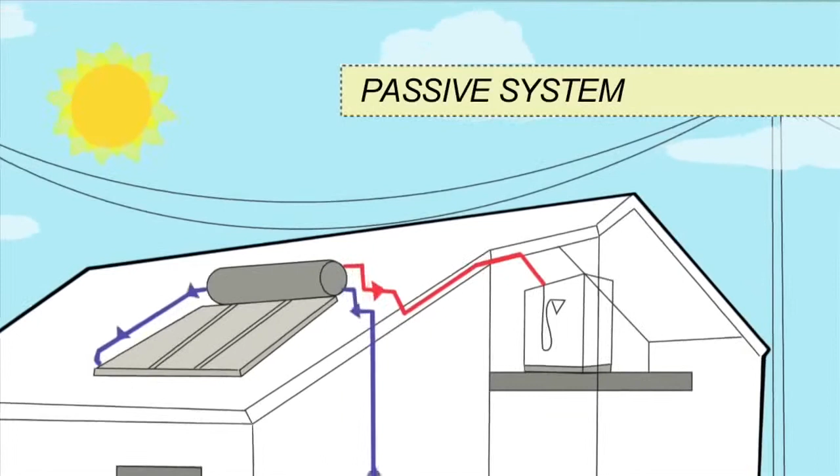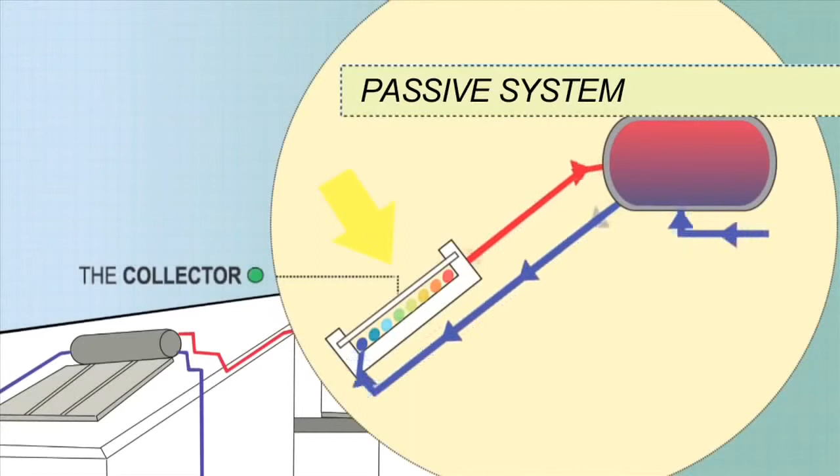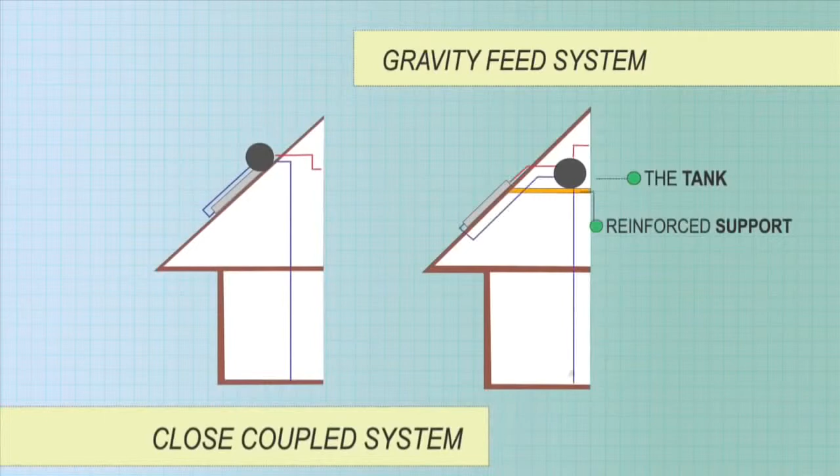In passive systems, also known as thermosiphon systems, the tank sits above the collectors. Colder water sinks into the collectors, whilst warmer water rises unassisted from the collectors into the tank. The tank may sit on the roof with the collector, a close-coupled system, or within the roof cavity above the collector, a gravity feed system. With these systems, the roof support structures must be strong enough to handle weights of up to 800 kilograms.

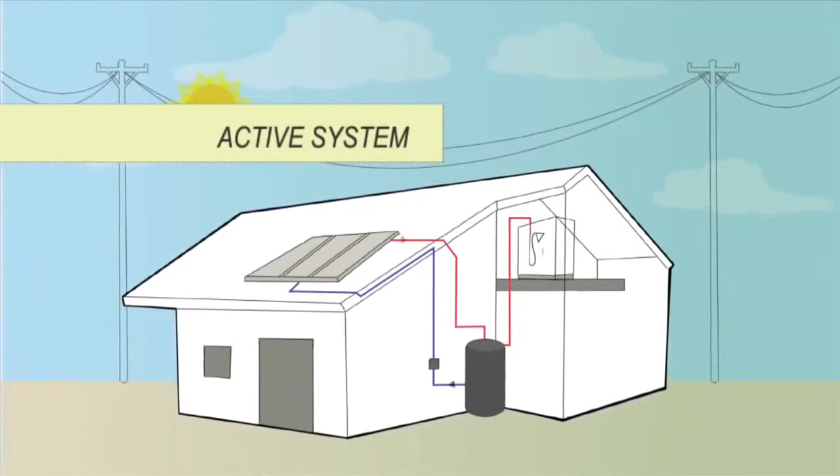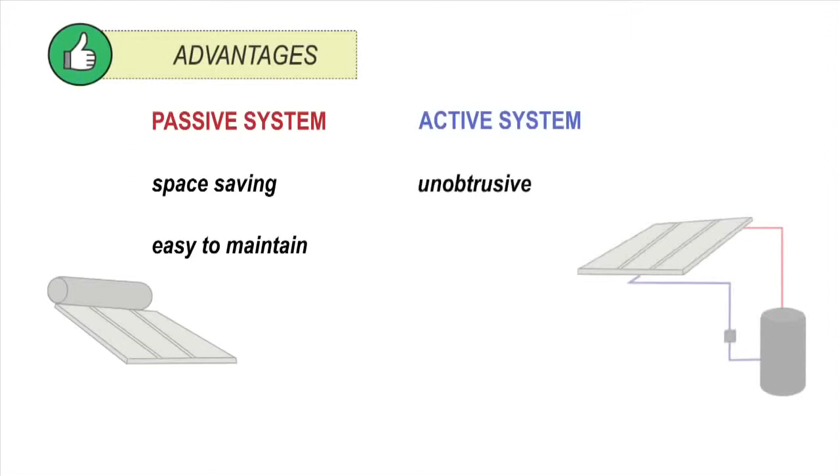Active systems use a small pump to move water between the collectors and the tank. The location of the tank can be within the roof or on the ground. Each type of system has advantages. A passive system is space-saving and is easy to maintain with no moving parts. An active system is unobtrusive, lightweight, can use an existing tank, and the tank can be located closer to where hot water is used, reducing heating loss in pipes, but the pump uses some energy.

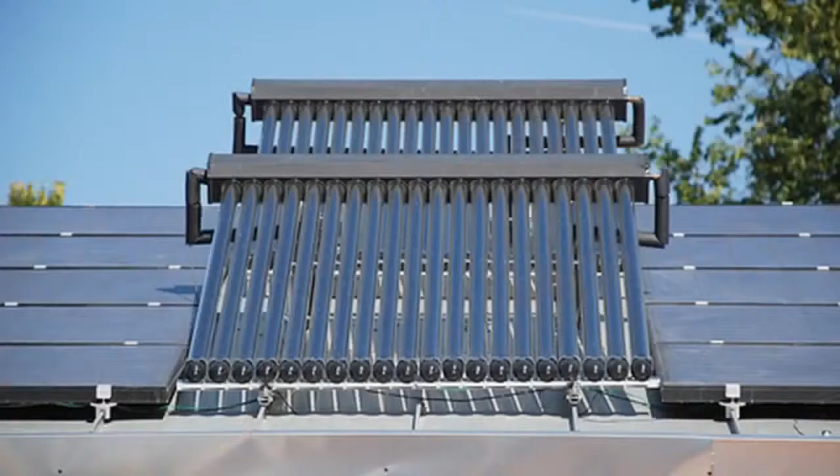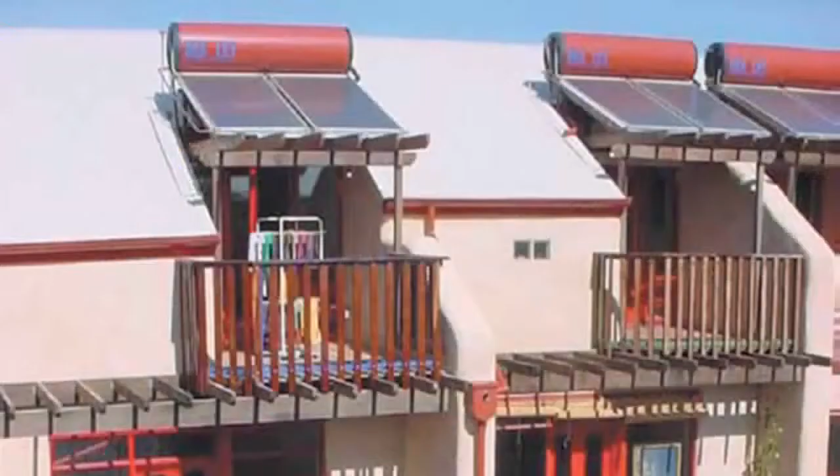There are two collector types to choose from: flat plate and evacuated tubes. Evacuated tubes have the advantage of receiving perpendicular radiation for a greater part of the day. This, combined with their vacuum insulation, means good winter performance. Flat plate collectors, particularly if purchased as part of a close-coupled system, can be more affordable than evacuated tube collectors. However, the prices of evacuated tubes have fallen in recent years.

Collectors should ideally face true north in a shade-free position. Facing the collectors 45 degrees from the north will result in only minor reductions in performance. The ideal inclination is the angle of latitude plus 5 to 10 degrees. Sydney's latitude is 33.5 degrees, so an ideal angle of inclination would be around 40. However, plus or minus 15 degrees would still provide adequate performance.

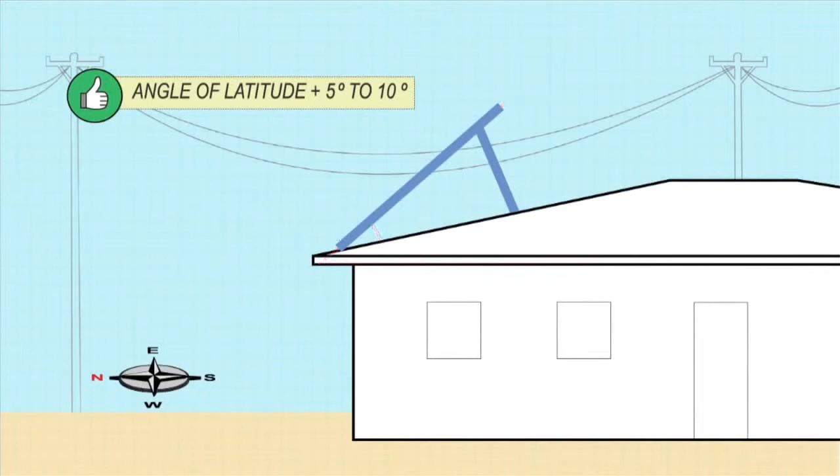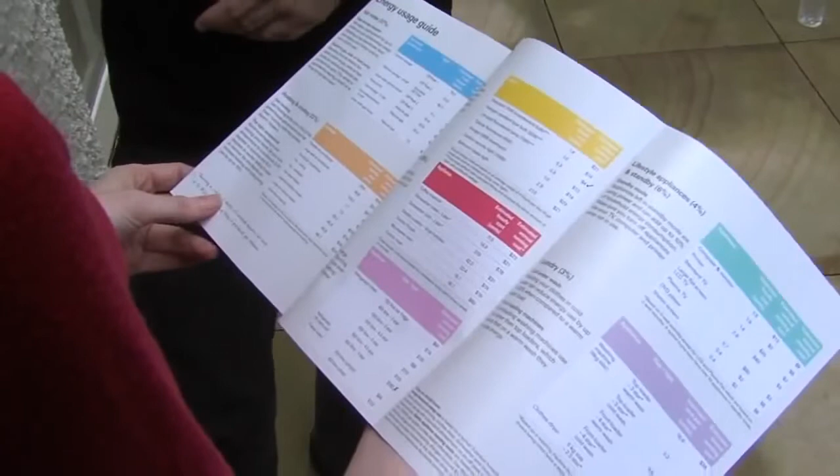If your collectors face due east or west, the lower the angle of inclination, the better. However, to allow thermosiphon flow, you must always keep the angle above 10 degrees. For the correct sizing of your collectors and tank, consult manufacturer's guidelines to see what is best for the climate and household.

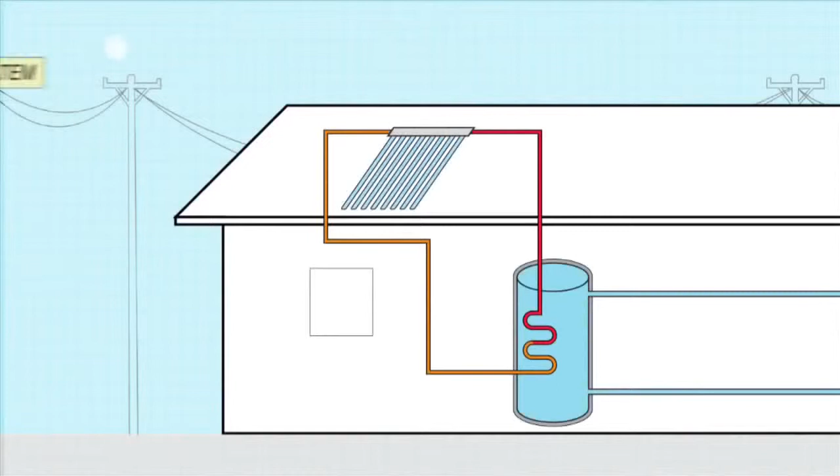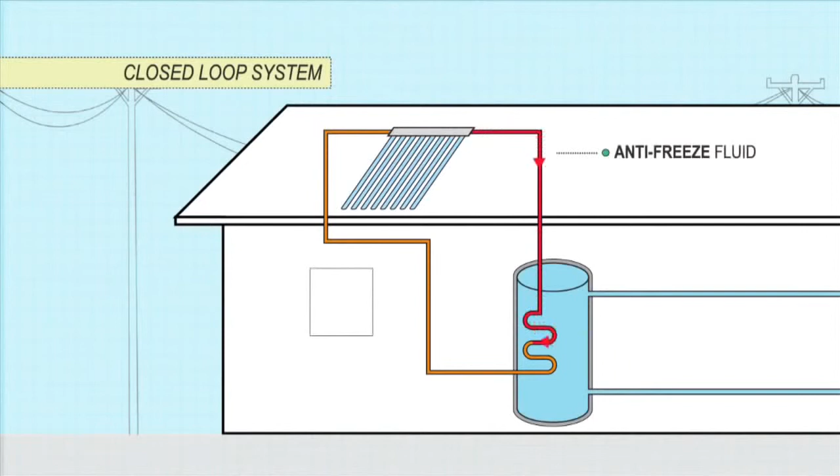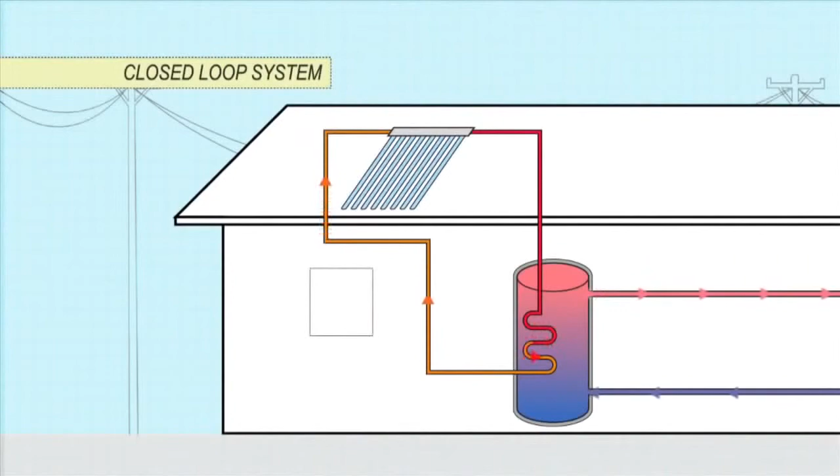In places with minor frosts, evacuated tubes may offer enough inbuilt protection. In climates with regular frosts, indirect or closed-loop systems are the most popular and reliable form of frost protection. Instead of water, an antifreeze fluid is heated in the collectors. The antifreeze passes heat onto the water via a heat exchanger. The antifreeze does not come into contact with the household water supply. Other frost protection methods are available, such as frost protection valves, temperature controlled pumps, and drainback systems.

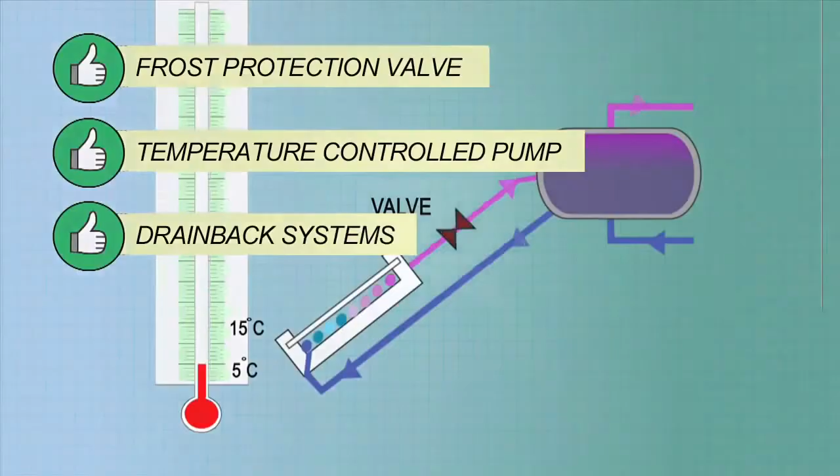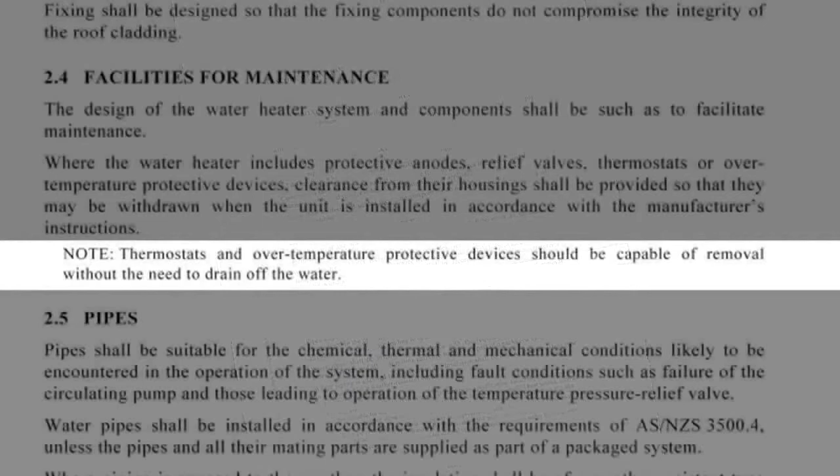In an Australian summer, water in collectors can easily approach boiling point. This can cause excessive pressure buildup and can damage the lining of vitreous enamel tanks. The Australian standards state that solar hot water systems must provide over-temperature protection without draining water, so a temperature pressure relief valve is not enough.

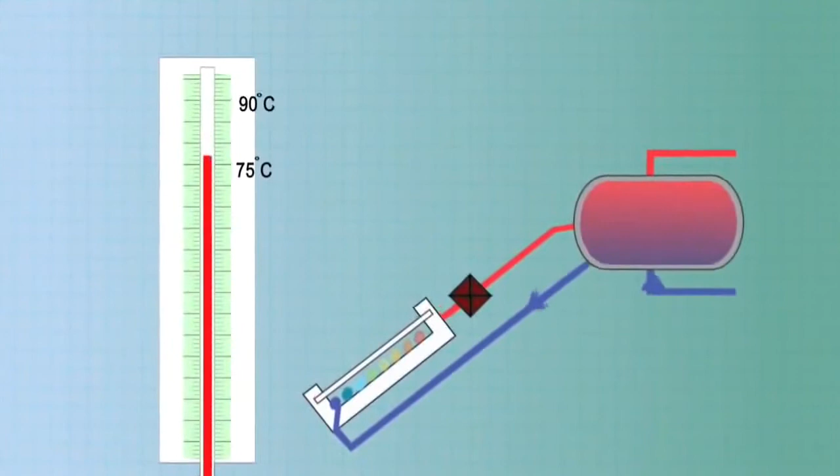The most common way to prevent overheating in the tank is by automatically stopping the circulation between collector and tank when the tank water gets too hot. This can be done using a solar control valve or a temperature-controlled pump. See the fact sheet on the Trade Secrets website for more information about how to control for frost and overheating.

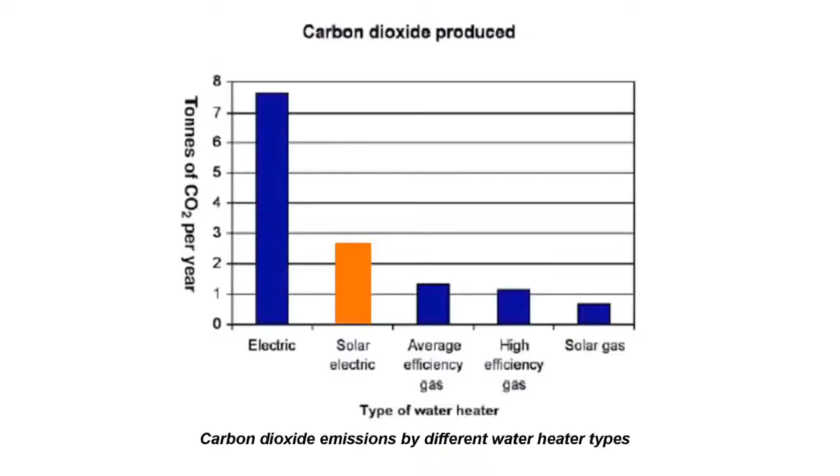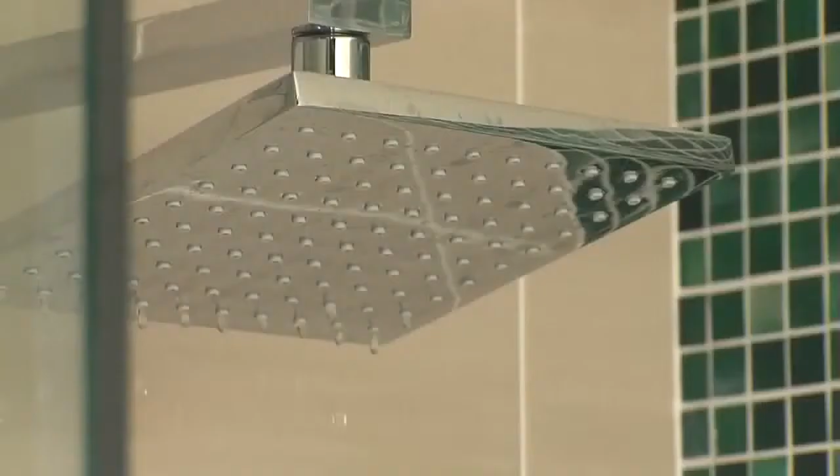The solar hot water system will require boosting at some times of the year. Electric boosters use a lot of power, so make sure the booster is controlled by a manual in-house switch. This switch should include a light to indicate when on. Boosters which have no in-house switch or are permanently on are wasteful, as they often heat water to 60 degrees, water which would otherwise be heated by the sun.

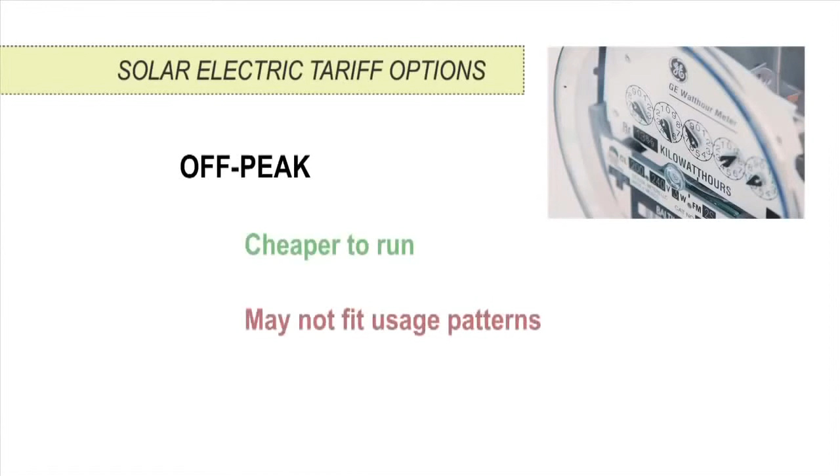When advising the householder on their energy tariff options, explain the pros and cons of each option. A regular tariff allows boosting at any time, but it won't lead to a reduction in their bills if their previous system was electric off-peak. Off-peak will be cheaper, but may not fit the hot water usage patterns of all households. If available, extended off-peak or off-peak 2 is often a good compromise.

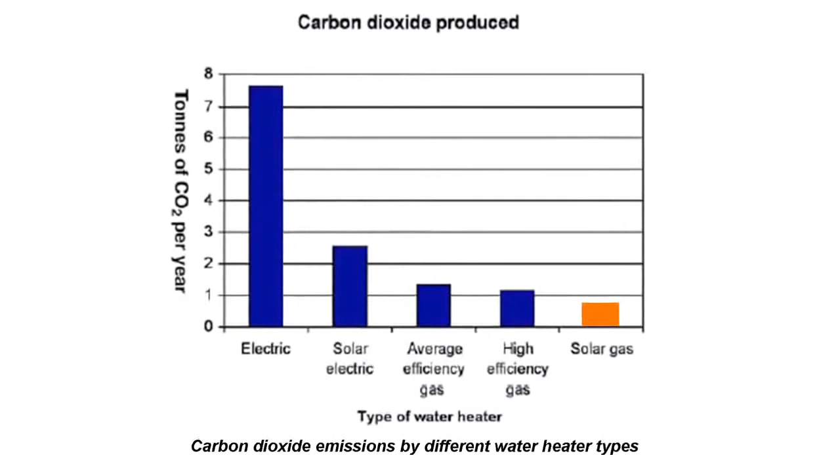Natural gas boosters have the advantage of lower emissions and running costs compared to electric boosters, and also aren't subject to time of use restrictions. Install a timer on gas storage boosters to ensure the gas does not heat water which would otherwise be heated by the sun.

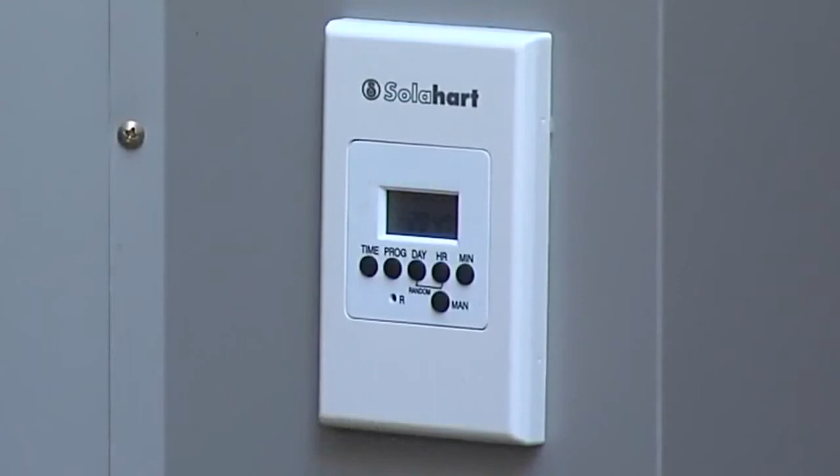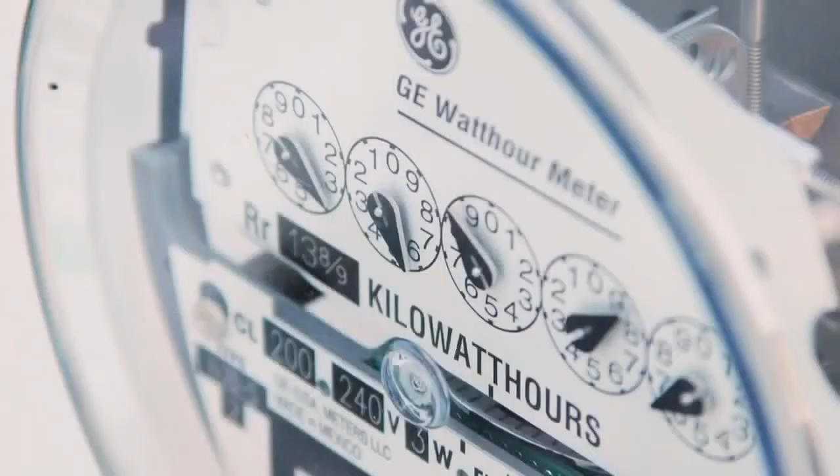So, select the system for the climate and use appropriate temperature controls, locate the collector and tank to maximise performance, install a manual boost switch, and connect to a tariff which minimises emissions and costs.